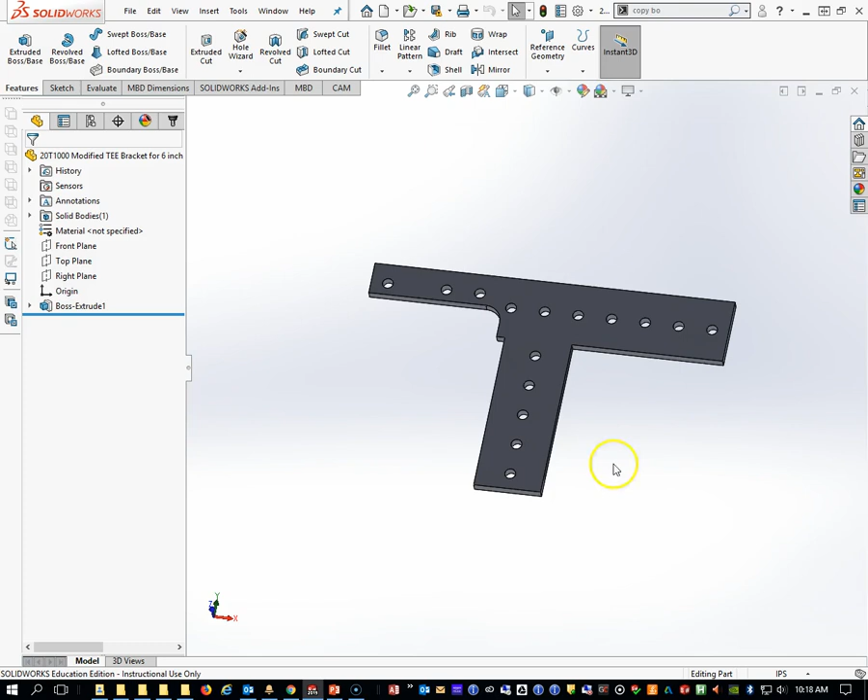Okay, purpose of this video is to help you get from Solidworks to our plasma cutter. We're going to start with our Solidworks part, take it into the Torchmate software, which is ultimately going to be used to create the toolpaths, and then hopefully be able to cut out some parts on the plasma cutter.

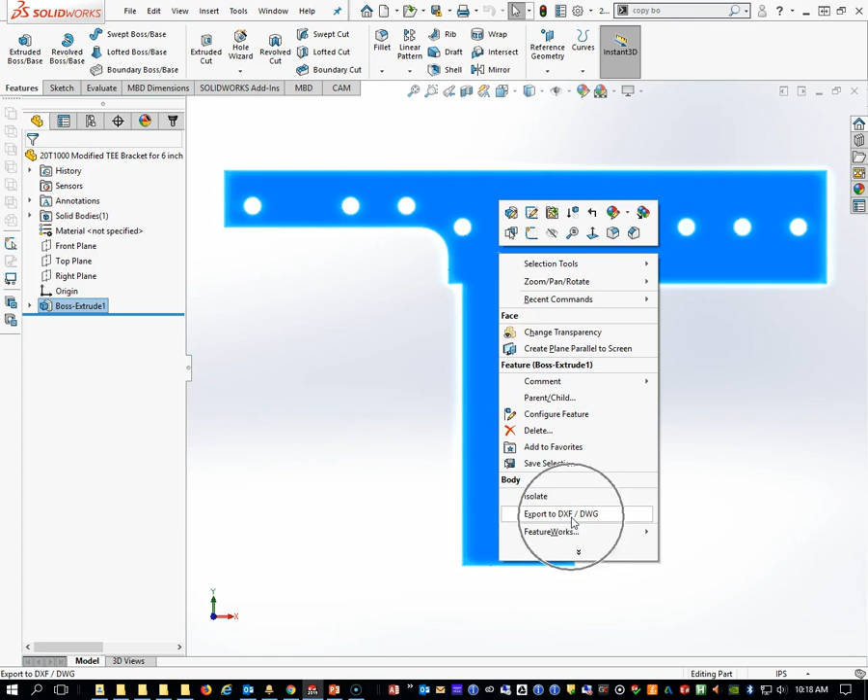I'm looking at this T-bracket that we modified for this year's chassis. I like to look at things perpendicular when I'm making the DXF file that's needed. So I'm going to look at it straight on. While it's highlighted in blue, I'm going to right click and go to Export DXF. Now it's a two-step process. It's going to ask for a location for that DXF file. I'm going to put it in with our GrabCAD stuff in the chassis folder.

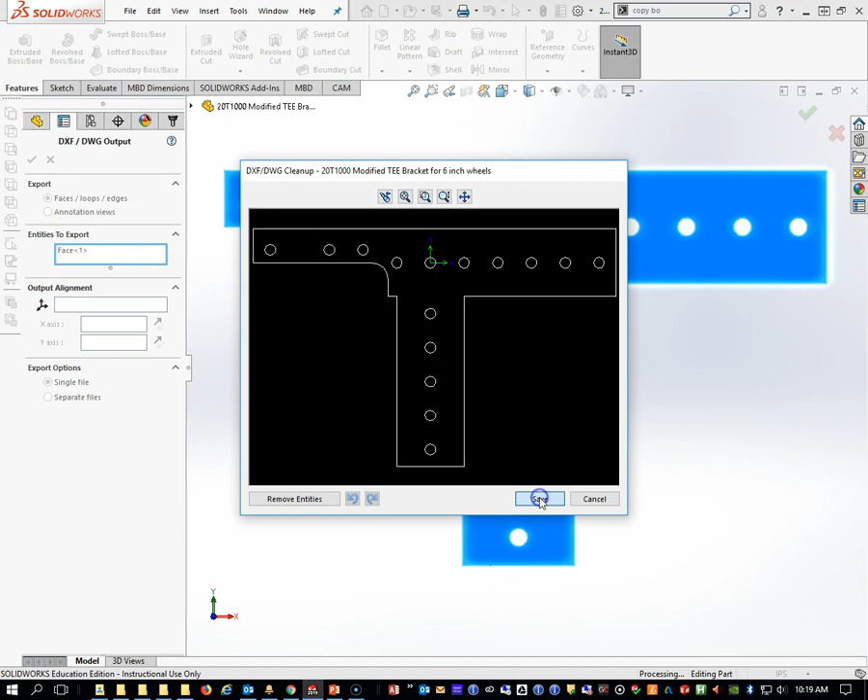And then it's going to ask, is there anything to edit? And I'm going to leave this alone. We can edit it in the Torchmate software. So I'm going to take that whole surface and hit OK. Hit save again. As I said, it was a two-step process, and that pretty much created our DXF. Next, I'm going to open up the Torchmate software and add the tool.

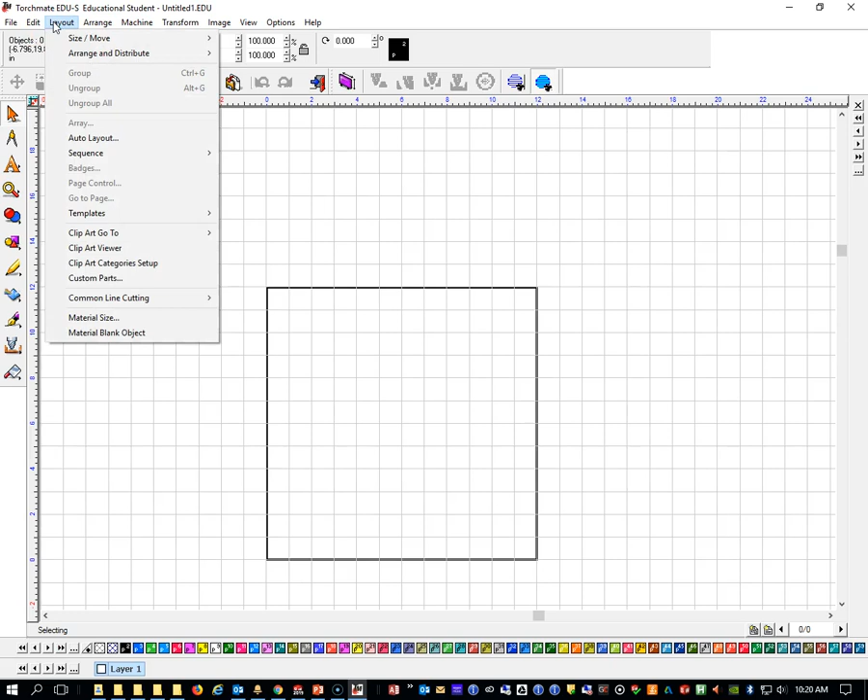Okay, I'm here in the Torchmate software, and depending on how many of these brackets we're going to make or what size material we're going to use, we may edit this box right here. So the easy way to do that is to go to Layout and go to Material Size, and you can set up whatever size piece of aluminum or steel that you're cutting on the plasma cutter. For our purposes, I'm going to leave it at 12 by 12 because I know that this T bracket is going to fit, and I think I only need 4 of them, so we should be good to go.

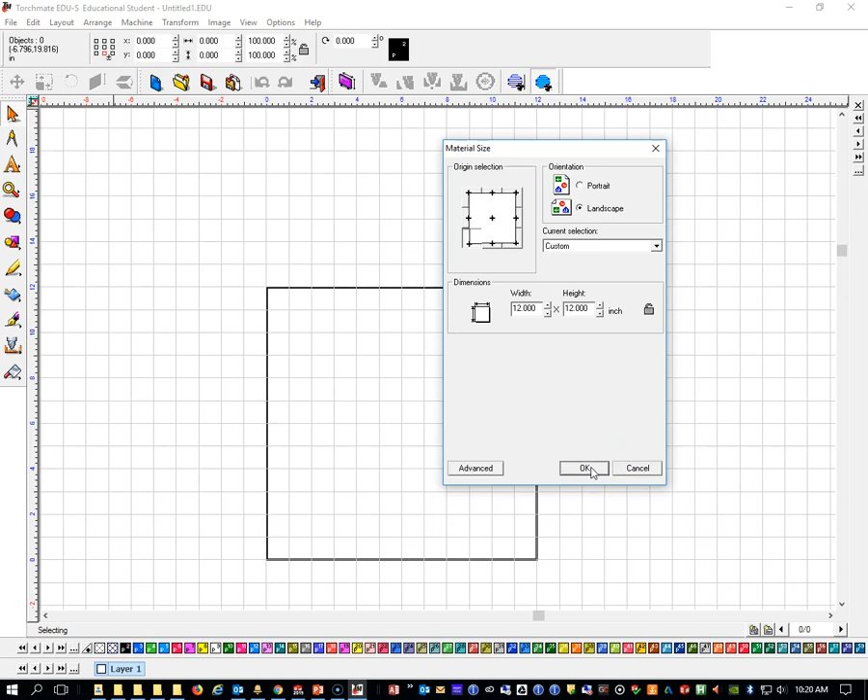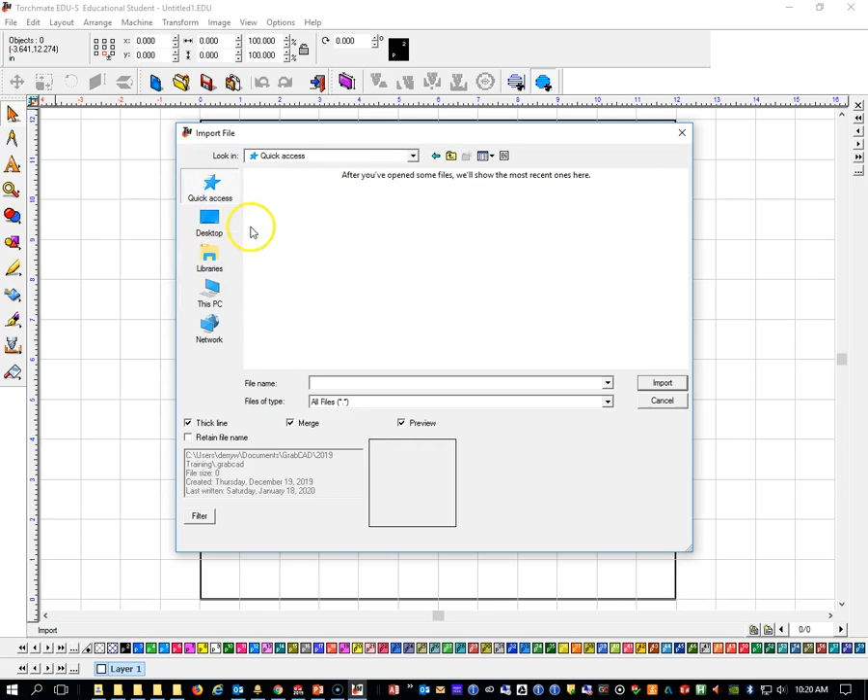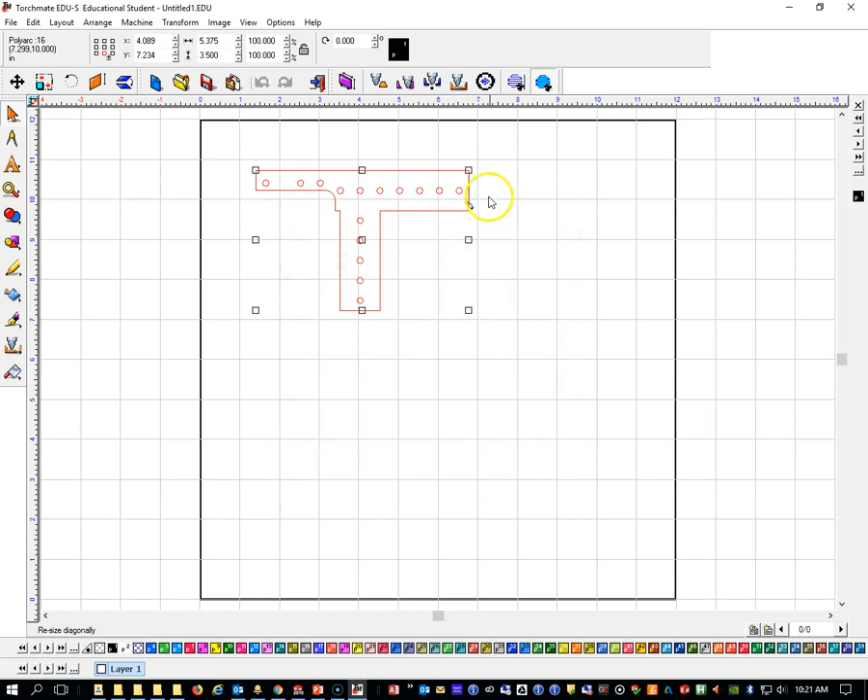All right, next up we're going to import this. So we're going to go to File and go to Import, and then we've got to find that file that we just saved. So I'm going to go to Quick Access, go to my documents, go to GrabCAD, and find that part. When I click here, it's going to ask for changing a font and so forth. We're going to leave this standard polyarcs, leave it alone. Hit OK. And okay, we have our part here and we can move it around.

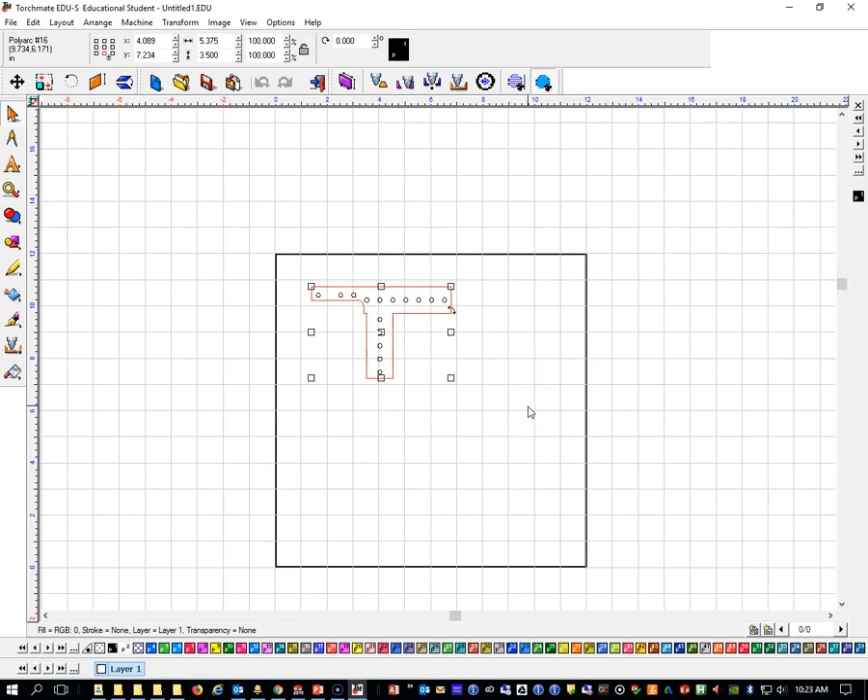We want to be very careful though. A lot of times, whether we're bringing into Torchmate or VCarve or any other software, when you create your DXF, right now if I click off to the side, you'll notice I'm selecting the perimeter, the outside of that, but I don't have my circles. And you may, for example, select everything except one of the circles and then try to move it, and now this file is kind of messed up. So you want to be really careful that you select everything when you're moving it around.

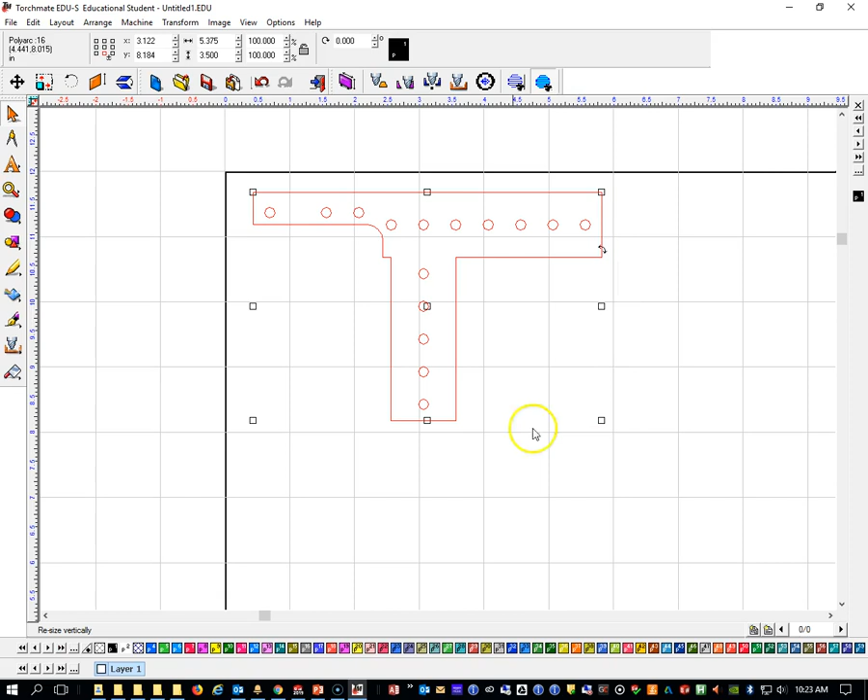Now in this case, we are not going to use the holes because the holes are not cut accurately enough on the plasma cutter. So I'm going to go ahead and delete those. But if those were part of the job, we would want to be very careful about how we move things around so that we didn't get rid of them. So I'm going to get inside there and just knock out my holes and delete them. This is the part that we want.

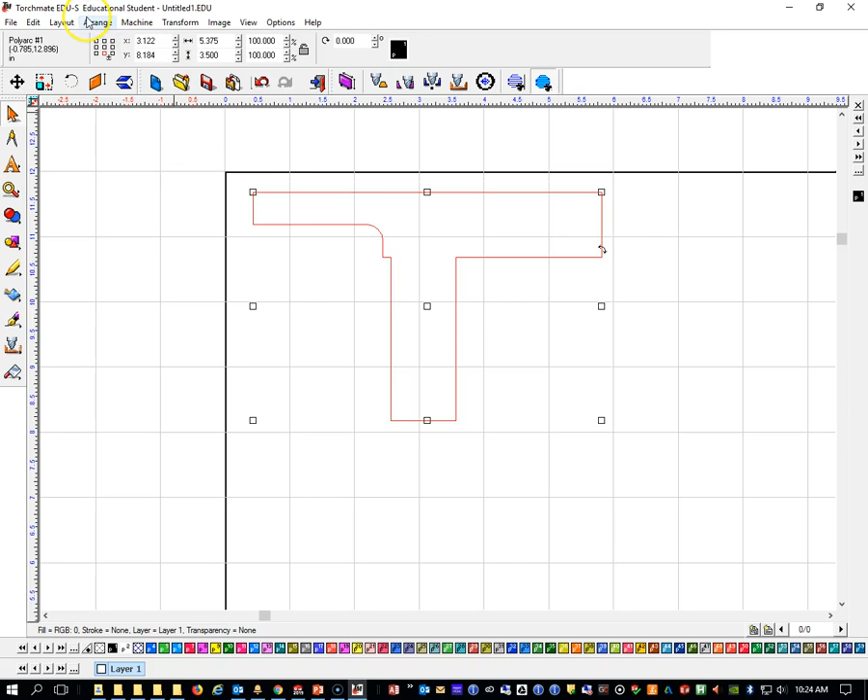Whenever you bring a DXF file into any software, it doesn't always come in connected. So I'm going to start by selecting it up here and going to Arrange and go to Connect Path, and just make sure that all of the pieces are connected. And then we can go to Arrange and go to Make Path. Now, we want to make a few of these parts, so it makes sense right now to go ahead and make some copies of this.

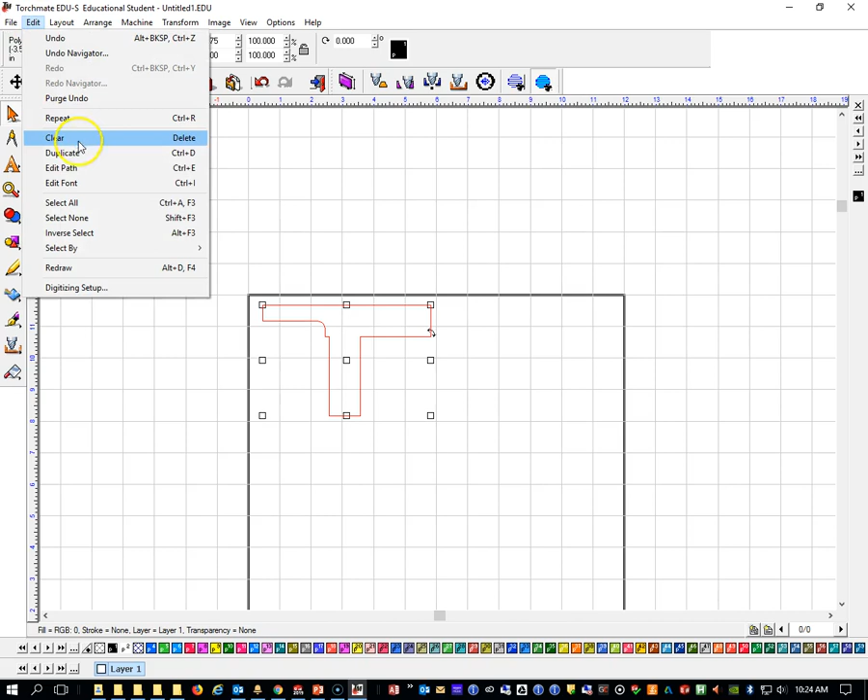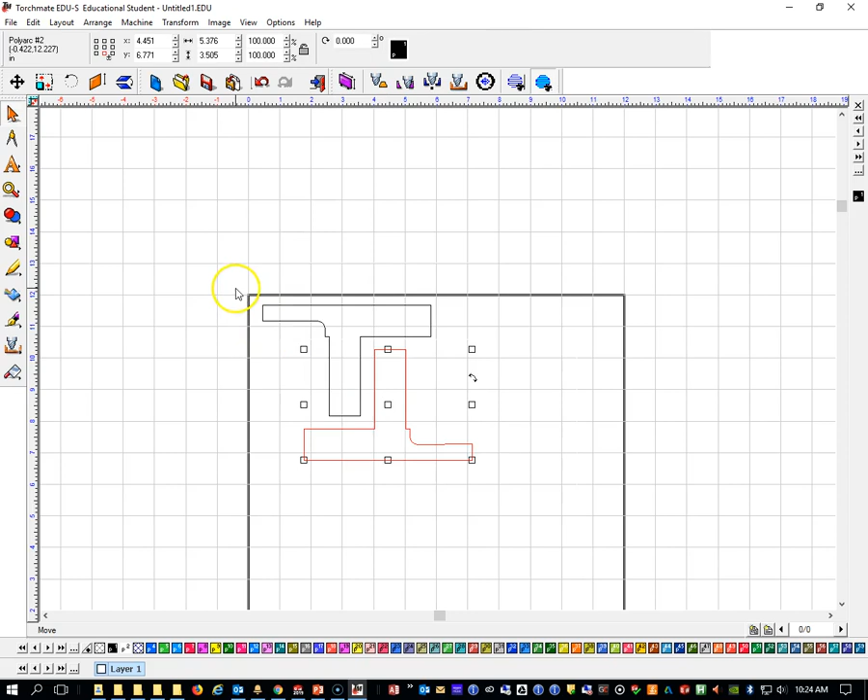So I'm going to go to Edit and go ahead and copy this by duplicating. All right. Might be nice to turn this around so we're not wasting as much material. And I'm going to put this guy over here, nest it in. We've got to be careful about how tightly we nest them because we could end up with trouble with the torch running into the lead in or so forth.

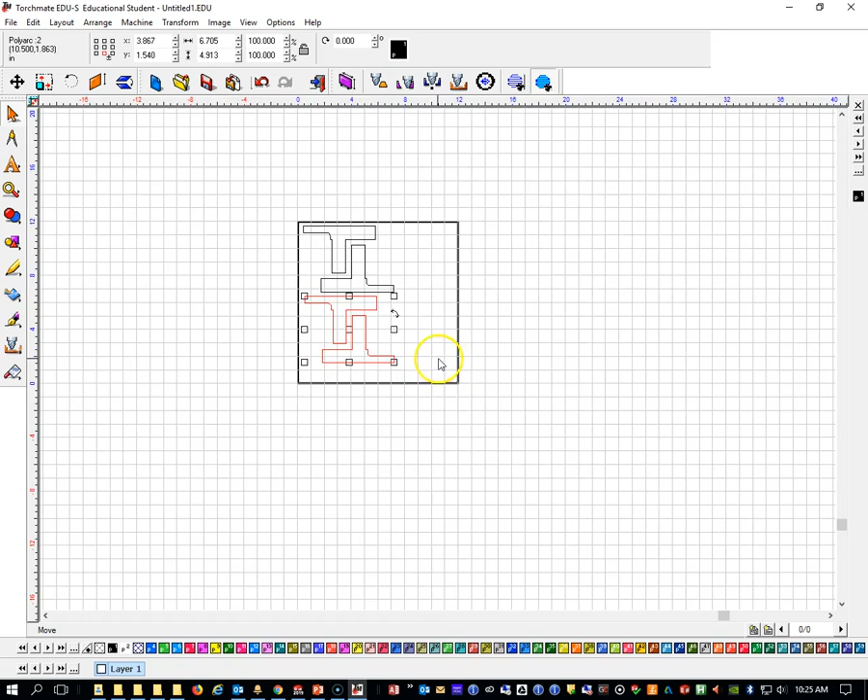I'm going to go to Layout again and Edit, and make another duplicate of my pair. And I think we needed 8 of these. So I'll select this again. See if we can fit this on our sheet. I may need to edit our sheet in order to get all these in here. Looks like we can fit them.

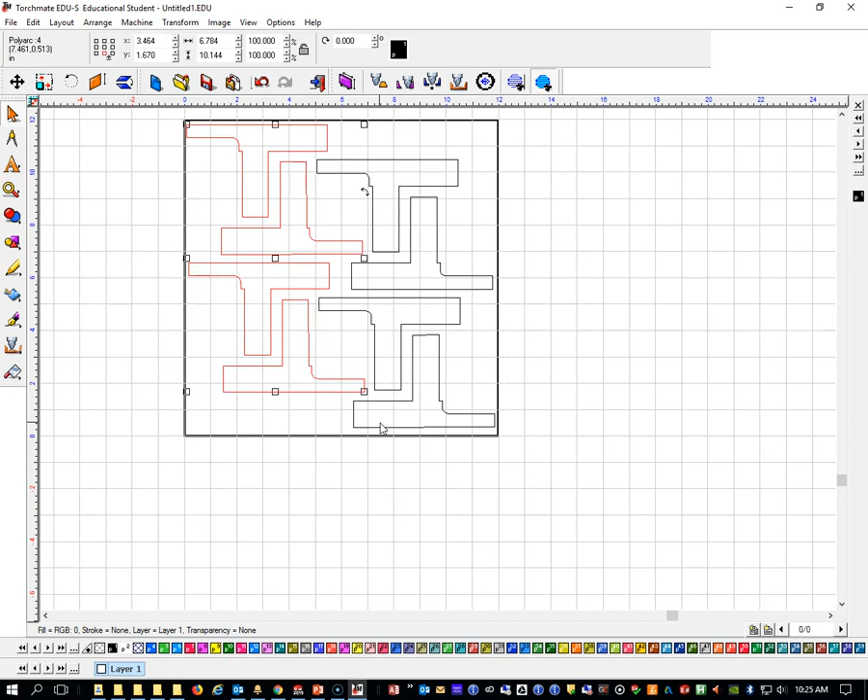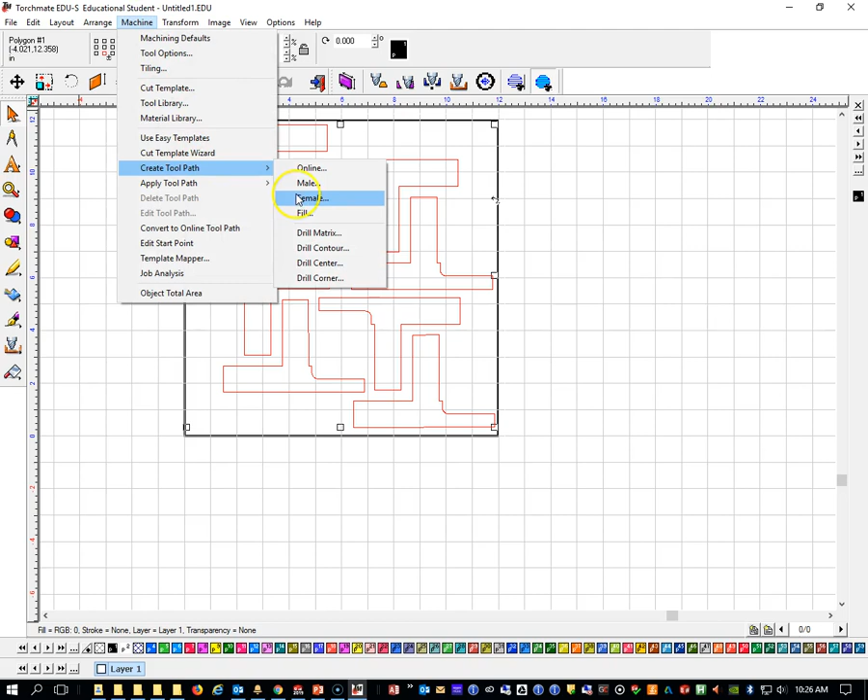All right, so now we have all of our artwork, so to speak, and now we want to add the tool paths to that. So again, we're going to select everything. One more time, I'm going to go to Arrange and go to Make Path. Then we're going to go to Machine and go to Create Tool Path, Male. Now, the material thickness here doesn't really matter. What matters is our settings when we get to the plasma cutter. I'm just going to leave it at 1/4 inch.

Under the Basic Cut tab, we do want to come in and add a feed rate. I'm going to set our feed rate to 100, not because that's what we're going to use, but because it's easy to edit. On the plasma cutter, we can do a percentage of 100 and it's easy to change. Depending on the thickness of material and the type of material we're using, we will change our feed rates on the plasma cutter itself, but it's nice to leave it at 100 here.

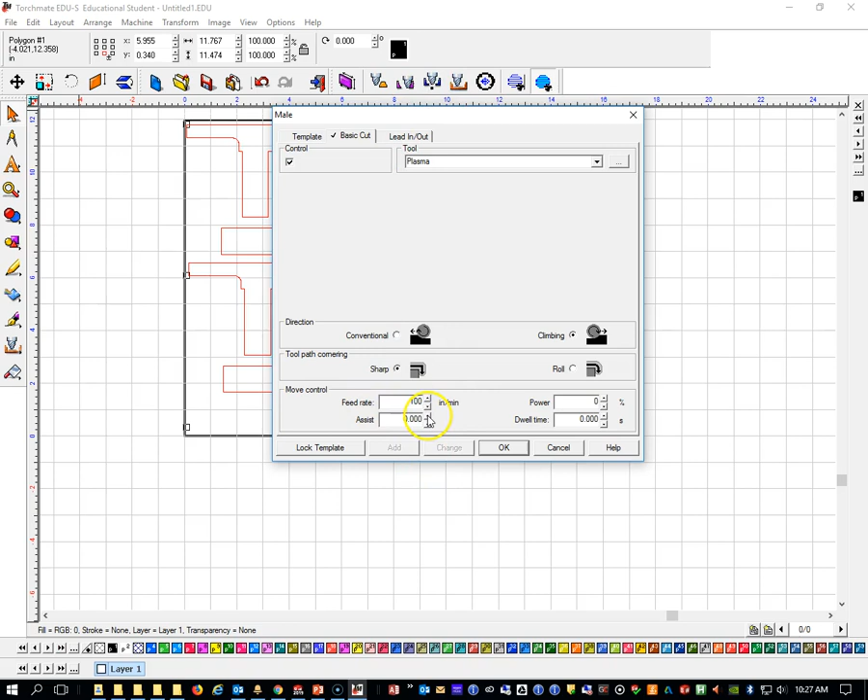Lead in and lead out. We want a lead in. We're going to create a lead in. You can create an arc or a line, and we need to give it a distance. I'm going to go with a line and make it 1/8 of an inch and hit OK.

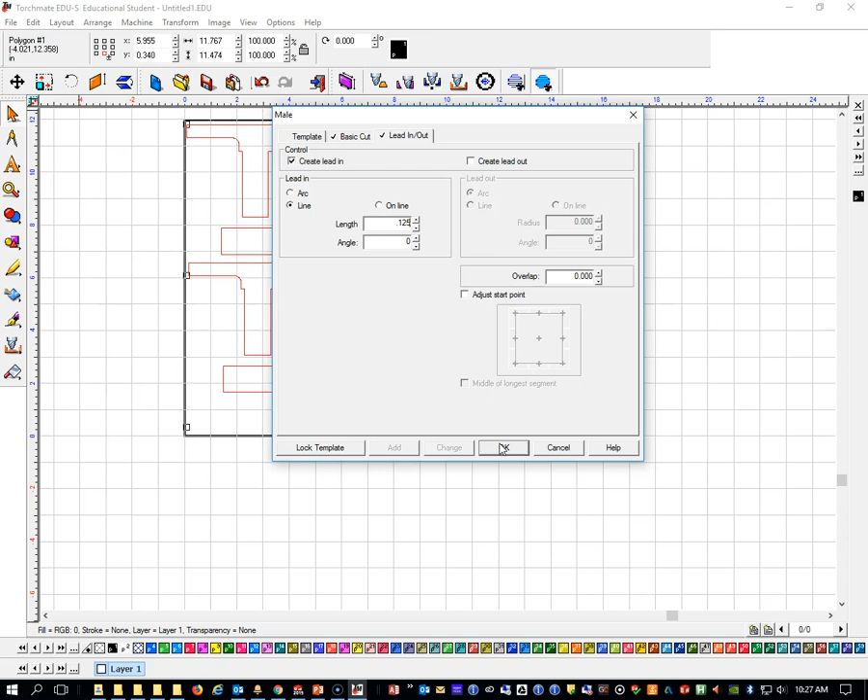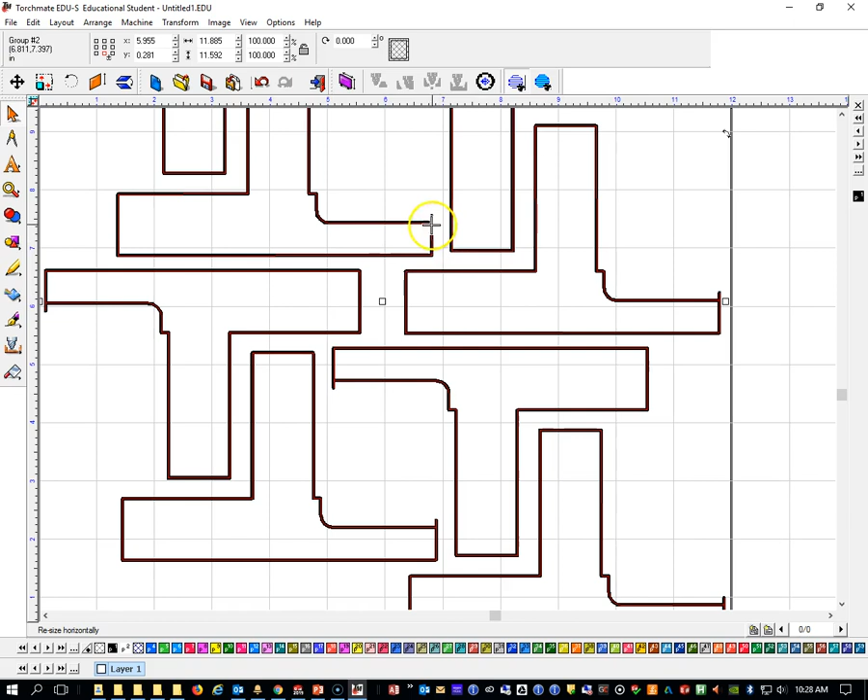Now, yours may look different than mine right now, and it has to do with the view settings. So you want to go to View, and I'm going to go to Show Tool Paths Only right now. My artwork is no longer showing, and these are my tool paths, and these are the lead-ins that I was talking about. And it looks like they're in a fine spot. It's not going to create any problems for us. So that's it for this. You're just going to save this file and then bring it over to the plasma cutter. And on the plasma cutter, you're going to output this as a tool path.